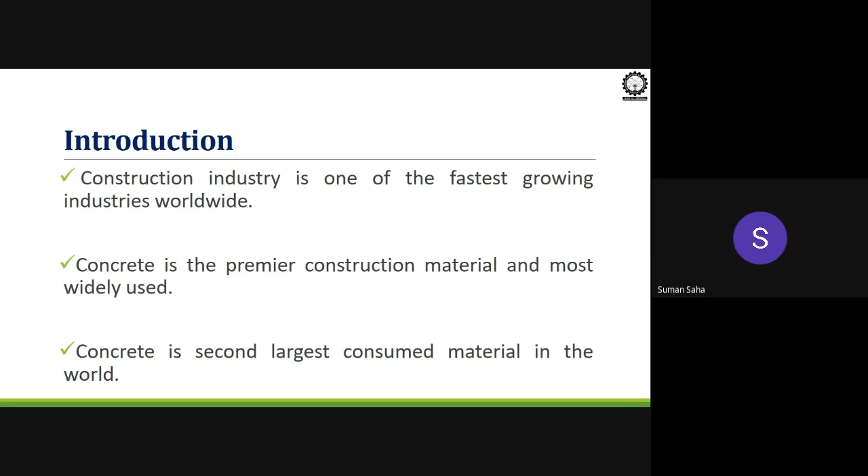Now, concrete is not the only construction material, so several things are there. Due to that, we need a lot of natural resource procurement to produce cement and aggregates. All are natural resources. If we consume totally in high demand, they may not be available in coming days or in the future, then we will face a lot of problems creating concrete with desired properties.

As I mentioned, people claim that this industry pollutes the environment significantly, but believe me, we pollute, but not that much. We are changing the scenario by finding alternative materials for concrete or for other purposes, so that we can minimize the pollution level and also conserve natural resources for the future.

As we know, from the point of view of any institute, we may now have 60 students in class 10, so we may need a small classroom. But in 5 or 10 years, the student strength may increase to 100 or 120, and in that case we need a larger classroom. So our requirements keep on changing, and we need to develop our infrastructure properly to accommodate all such desires.

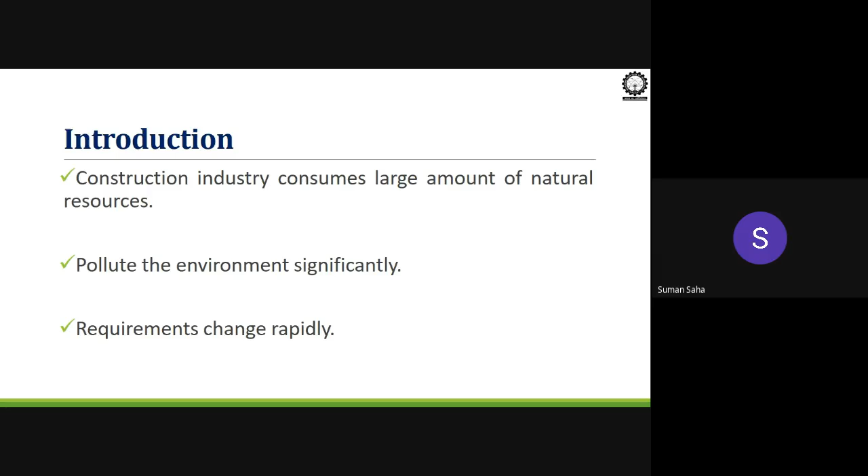I will discuss that in detail later. So in the construction industry, several topics are there for research to make effective advancement. I have mentioned only 4 parts: building materials, concrete technology, project management, and construction technologies, etc.

You have n number of sectors like finishing, plumbing, electricity fixing. So these 4 are not the ultimate parts of the construction industry for advancement. But today's talk, we will talk only about concrete technology, how concrete is evolving, how different types of concrete come into the picture to fulfill our wishes, our desire, our requirements.

So I have made a list about the different types of concrete which are getting adopted nowadays very well. But again, I am reminding you, this is not the ultimate list. Many types of concrete are there, and those types of concrete have their specific purpose to be in use.

I just request you, if you search in Google itself, you will get n number of concretes, but I have made a list, and among all the concretes, we will talk in detail about geopolymer concrete, and I will tell you why it is very special to be an alternative concrete for future days. First, I will describe a few words about these types of concrete, like high performance concrete, self compacting concrete, fiber reinforced concrete, recycled aggregate concrete, high volume fly ash concrete, reactive powder concrete, self-healing concrete, and at the end, geopolymer concrete in detail.

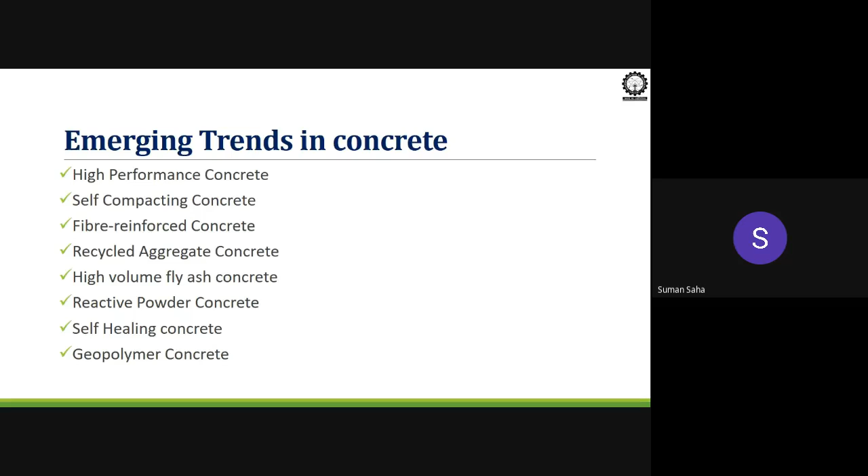By the name itself, since you are all from a civil engineering background, you can understand what specific characteristics are there for this particular concrete. Just because if we talk about high performance concrete, what is that? It itself says that concrete should perform high. What does it mean? In normal concrete, usually what we do is use OPC, and we use fine aggregate, coarse aggregate, water, admixture, different things.

But normal OPC strength, maybe maximum we can design the mix design concrete up to M50 or M60. But when it comes to the terms of high performance concrete, performance is not only the compressive strength. Even though we know compressive strength is the main characteristic of concrete, along with that we should have proper workability from the starting of mixing to the placing of the concrete.

While concreting, when it's a large construction project, suppose we are going to cast 100 cubic meters of concrete, if it gets set within a short span of time, then it will be very difficult to use that type of concrete. Even this higher compressive strength for this type of concrete, we can expect more than 60 MPa strength after 28 days, but that's not the minimum -- 60 MPa is the minimum, higher can be the maximum, more and more.

One more type of concrete you can hear about is ultra high performance concrete. In that type of concrete, the compressive strength level is more than 100 MPa, and better durability properties should be there.

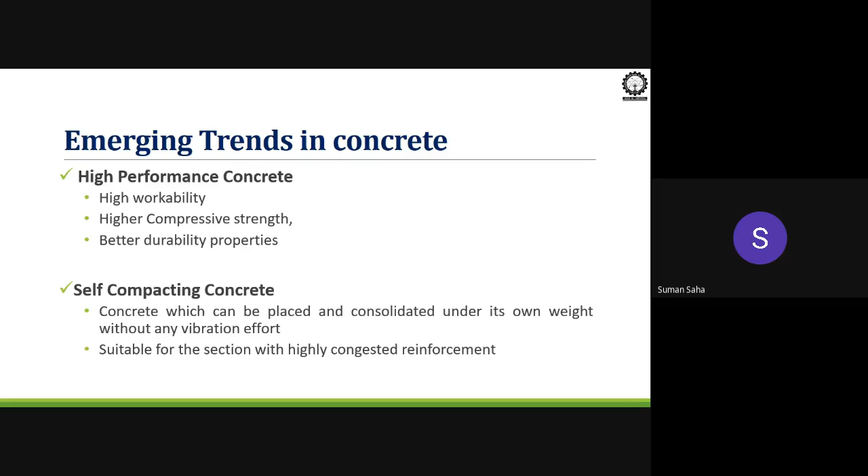Even all the industries are trying to use this concrete, introducing admixtures like proper doses of chemical admixtures, finer materials, so that without any vibration the concrete section can be cast, and it will be compacted by its own weight without any segregation, without any water evaporation. So it will be a very important type of concrete for the largely highly congested reinforcement section.

If you see here one photo, I have shown how the self-compacting concrete behaves, like one slump cone. If you put the concrete and lift the slump cone, the concrete will flow out on its own, without any segregation or water separation from the concrete, so it can be said to be cohesive.

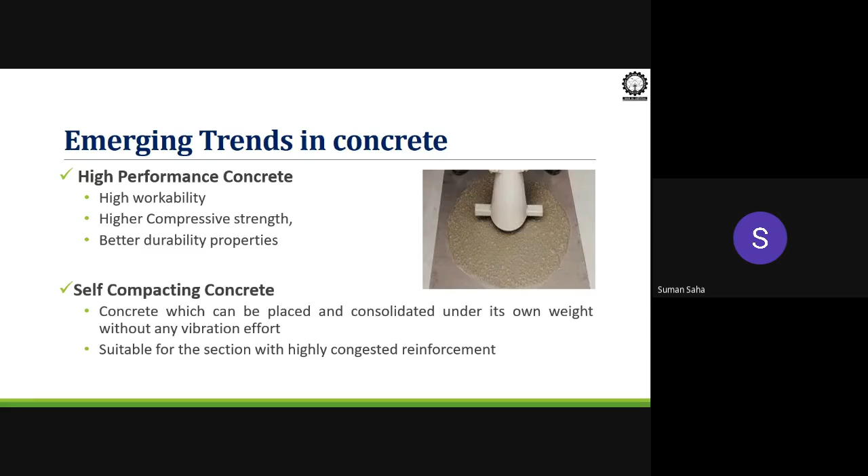So at the end we need to have at least the compressive strength, which is the main characteristic of the concrete. So it's always very important to notice whether this concrete is getting compacted properly or not by its own weight. If it is not getting compacted, you may get different kinds of problems when you remove the formwork, some bulging, or in some places voids. This will create a lot of problems later for gaining strength, as well as for durability aspects.

Next is fiber reinforced concrete. Why is it becoming very familiar, very famous in concrete construction? Just because we know concrete always performs better in compressive strength, but when we need a little tensile strength, or we feel more tensile strength should be there, or flexural strength should be there for the concrete, what we introduce is discrete fibers.

It may be steel, it may be polypropylene, it may be natural fibers, but this fiber, when introduced, is randomly oriented in the concrete mix, and it tries to arrest the crack. What it leads to, when you arrest the cracks, is that you try to keep the concrete in position, and outside ingredients like water or deteriorating agents should not penetrate the concrete. If they do not penetrate the concrete, it will serve for a longer time.

So again, these properties of fiber reinforced concrete depend on different types of fibers, and its geometry, like aspect ratio - I think all of you know - is a very important parameter for fiber reinforced concrete. Aspect ratio is nothing but the length of the fiber divided by the diameter of the fiber.

The distribution and orientation of the fibers in the concrete mix is very difficult to justify, but nowadays there is a lot of numerical modeling to understand how it gets distributed, how it gets oriented, how it arrests at the angle of orientation. A lot of research is going on. If you search papers on the internet, you will get a number of papers. So it's a promising area to do research.

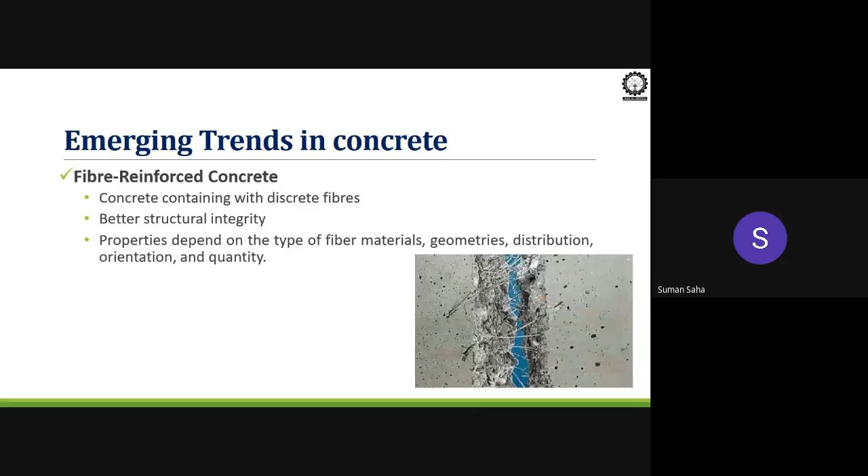As a result, total overall structural integrity of the concrete structure will get increased, and it will give better service to us. Next, recycled aggregate concrete.

It's nothing but - let me explain - recycle aggregate, what is it? As I told earlier, we need to preserve our natural resources. If we keep on using all the natural resources to produce concrete, after some time we may not get natural aggregates to produce concrete.

Along with that, we are generating a lot of concrete demolition waste due to various reasons. I told a few reasons earlier also. Some buildings, some concrete sections are there that have already served their life and now need to be demolished. For those types of structures, after demolition, if we can use this waste concrete part as aggregate - maybe as fine aggregate, maybe as coarse aggregate - then we can save a lot of natural resources.

So again, in that aspect too, a lot of drawbacks are there to using recycled aggregate effectively to get the desired properties. There are a number of papers on this, and even I have a few papers - not so many, very limited - but few papers are there on recycled aggregate concrete also.

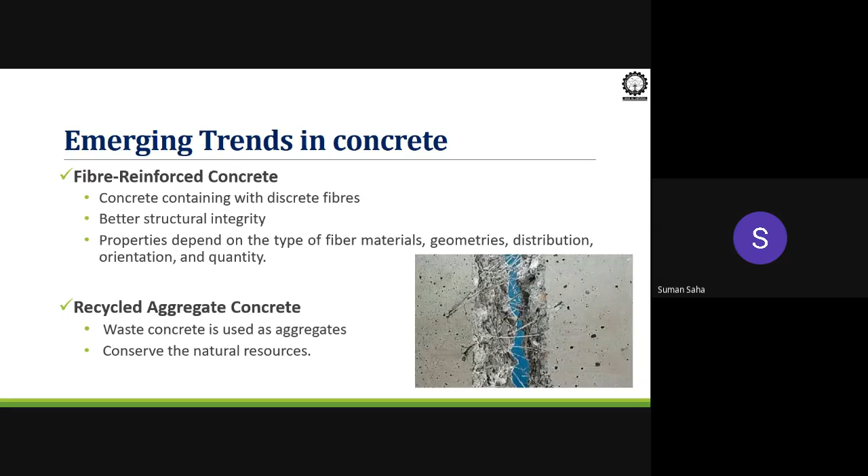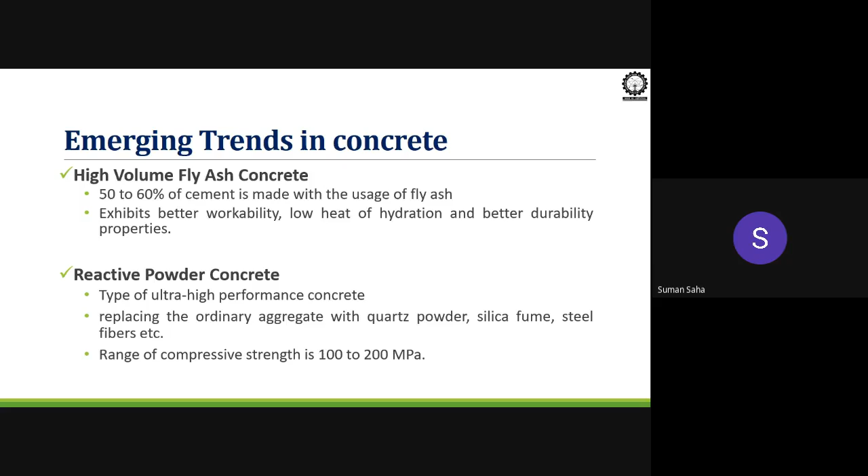To make it super compacted and gain high strength, usually quartz powder and silica fume are used. Even fly ash and GGBS are also getting used. When incorporating this material, we are trying to reduce the coarse aggregate in the concrete - there is a very minimum quantity of coarse aggregate in reactive powder concrete. It's now an emerging area for research and for application in daily life, but it has a lot of drawbacks we have to work on to use it effectively.

Next is self-healing concrete. The name itself tells that the concrete heals itself. You can search this as bacterial concrete also. Sometimes we introduce bacteria, and in the hardened concrete structure, they react with the hydrated product and create some carbonate or chemical substance to fill cracks or voids wherever they are generated. So it is said that these cracks are getting healed on their own due to the presence of the bacteria. Usually Bacillus bacteria are used as of now.

I don't have knowledge about other bacteria. It may have, we need to search.

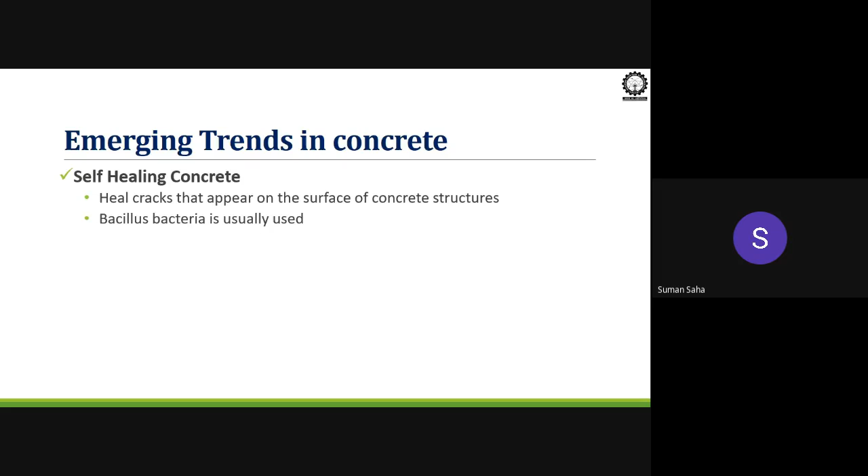As a result, it will be better durable concrete. And next, not last, but next, geopolymer concrete.

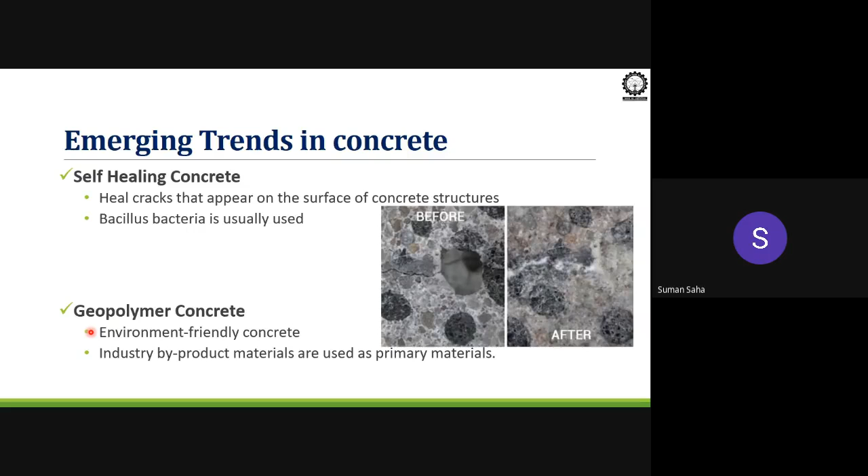It's environmentally friendly concrete. To produce this geopolymer concrete, we usually use industry byproduct materials as the primary materials. We will discuss this in detail, because to produce geopolymer concrete we are not going to use a single percentage of OPC, so it's OPC-free concrete. We use industry byproduct materials rich in silica and alumina, specifically fly ash and GGBS. Fly ash is a byproduct of thermal power plants, GGBS from steel plants. Silica fume can also be used, but it is a bit costly.

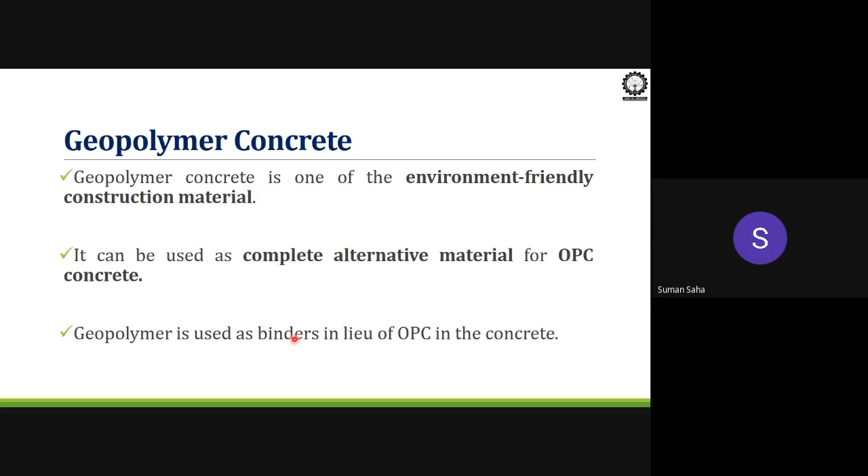So whenever we talk about the cost of concrete, we should not go beyond our limitation. If the concrete becomes too costly, people won't use it - it should be cheaper than OPC concrete, then only people will show interest to use it. As I told, geopolymer is used as a binder in lieu of OPC in concrete. So why not OPC concrete?

I have already mentioned that to produce OPC, we need a lot of natural resources and energy. Due to that, we may face shortage of natural resources in future. Even statistically, 5 to 8% of total carbon dioxide emission is from production and consumption of OPC alone. And we are a developing nation with a huge population. For that reason, we are the second largest cement producer, and consumption-wise also second, next to China.

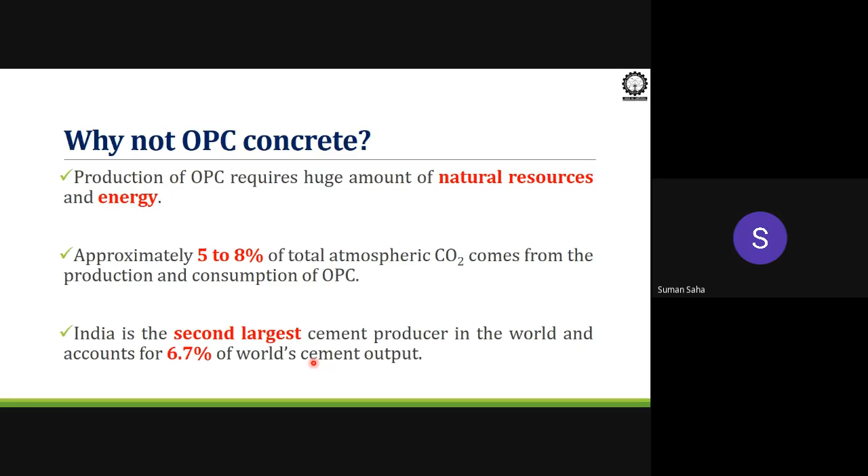Even though it accounts for only 6.7% of world cement output, we are second. If you check the statistics, we are far away from the basic per capita demand of cement consumption. Worldwide it is around 500 kg per capita per person, but in India it is only 195 kg. So we are so far away, but still we are the second producer and second consumer.

You can see as time passes, we are producing more cement and consuming more. So if we can reduce the consumption of cement by establishing alternative materials, it will be better. We can directly or indirectly reduce carbon dioxide emission, protect natural resources required to produce cement, and most importantly save the energy we employ to produce cement.

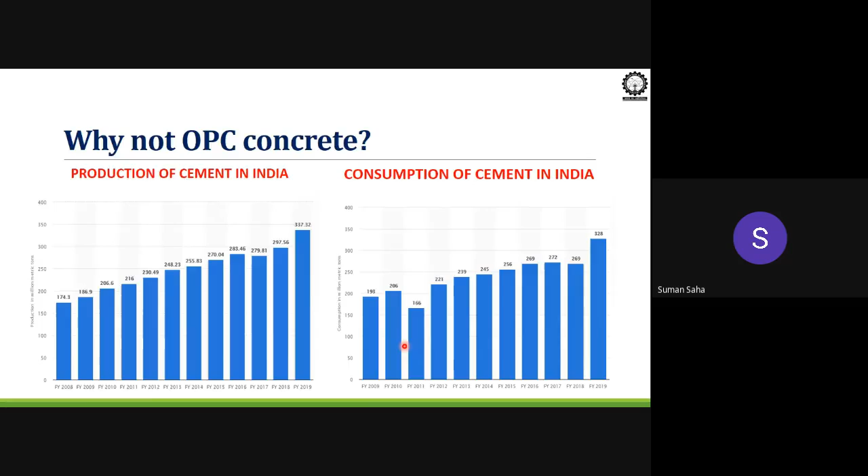I feel everyone knows about the production process of OPC in industry. So what is geopolymer? Geopolymer is nothing but an alternative binder material. It was established by Professor Davidovits, who is specialized in chemistry, in the year 1978.

But till today it is not getting used effectively by us. Research keeps on happening to make this concrete easily available to society for use. I will show you how tremendously research is increasing on this geopolymer concrete. It is a resultant product from source material very rich in silica and alumina, like fly ash and GGBS. This fly ash and GGBS will react with water, but very slowly - that's why we usually call them pozzolan materials. But if we provide a highly alkaline solution instead of water, it will react and create cement.

When water comes into the cement particle, it will start reacting and form the CSH and it will get hardened. Similarly, if you have an alkaline solution and pour in fly ash or GGBS, it will also start reacting, forming some CASH structures, and it will get hard like cement.

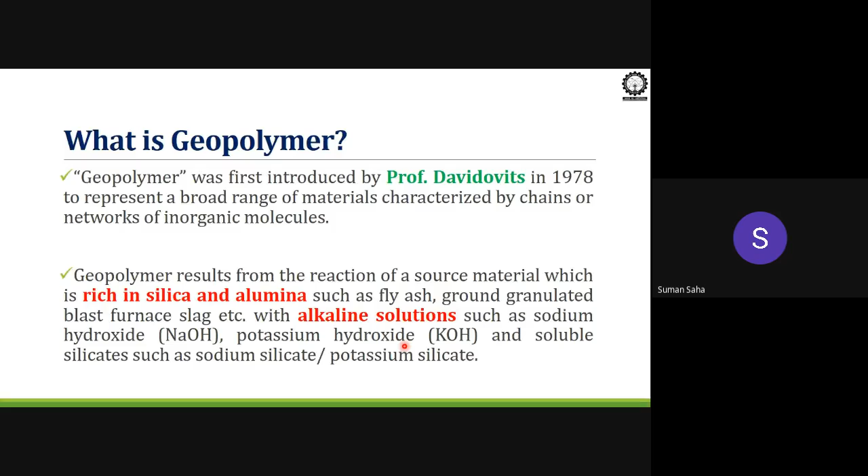That's why people started thinking and doing research to establish geopolymer as an alternative for cement. It's already established, but a lot of difficulties remain in using it effectively, which is why research is still going on.

After the reaction, you can see this type of bond. When cement reacts with water, CSH gel is produced. But with geopolymer, silica-alumina rich material reacts with the alkali solution to create this Si-O-Al bond, called the sialate structure or sialate bonds. It's like a nomenclature, chemically represented by the sialate bonds.

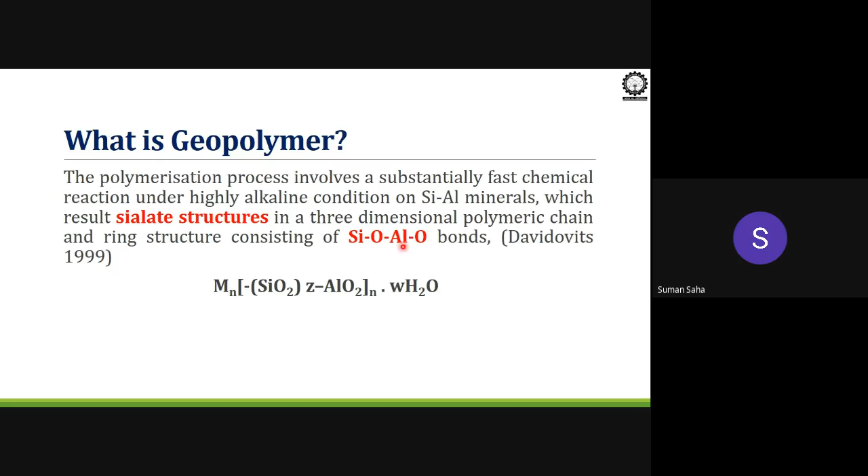I will show you the schematic reaction. This is the fly ash or GGBS, the silica-alumina rich material, written as N. The hydroxyl ion and H2O come from the alkaline solution, and it will first form silicate and aluminate, which react together to generate this bond and provide strength like cement.

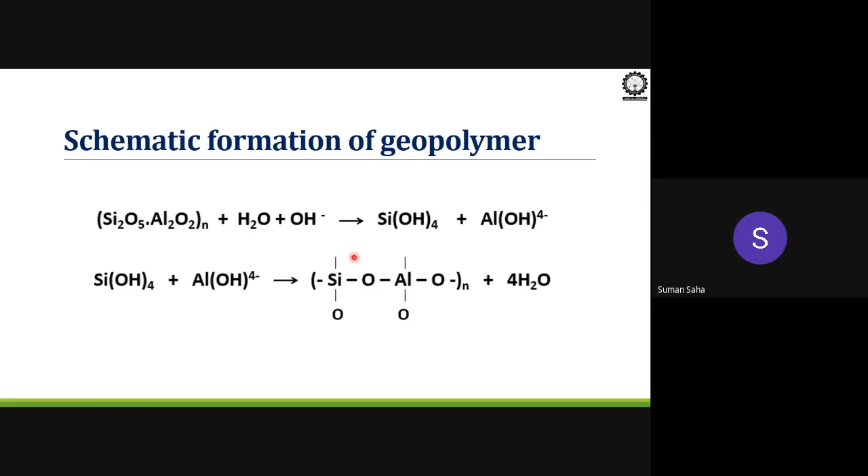I can show you different kinds of sialate structure based on the silica and alumina ratio in the source material. Fly ash or GGBS procured from Karnataka versus West Bengal will have different properties or content of silica and alumina. So if we know the silica and alumina ratio in the source material, we can tell which type of sialate structure will be formed.

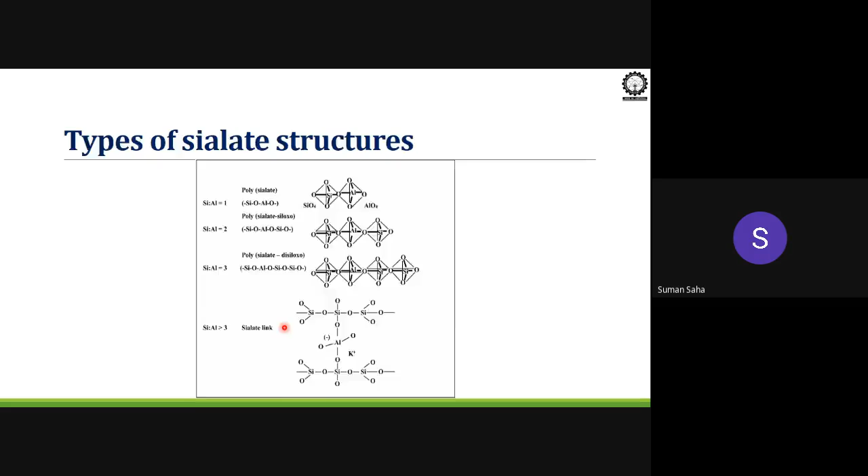When it is greater than 3, an n-number series will create the sialate structure, and a polymeric chain will form as a continuous structure. I'll show you the detailed process of this geopolymerization, how it works, in words, but I will show you visually.

Professor Duxson has established this model. You can see this alumina silicate source - it's nothing but alumina-silica rich material. When we provide this alkaline solution, this alumina silicate material dissolves and forms aluminate and silicate.

Then it starts reacting with each other and releases water, and gelation or coagulation starts to form this sialate structure. Later they keep reacting with each other and reorganize themselves, and at the end it creates the polymeric chain and gets hardened like normal cement does by forming calcium silicate hydrate.

Some literature calls this sodium aluminate silicate hydrate, but I think it's not better to say that, just because it's not a hydrated product. It's a product of a different chemical reaction, and at the end it creates the polymeric chain and helps harden the concrete.

So at the end, what are the constituents of geopolymer concrete? Firstly, source material is very important - silica-alumina rich source material. I have given a few examples: fine aggregate, coarse aggregate, and alkaline liquid. This is a very important part of geopolymer concrete.

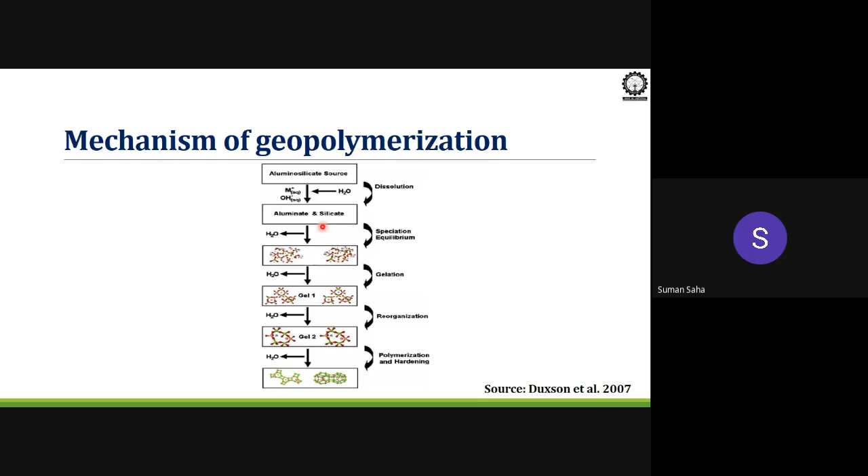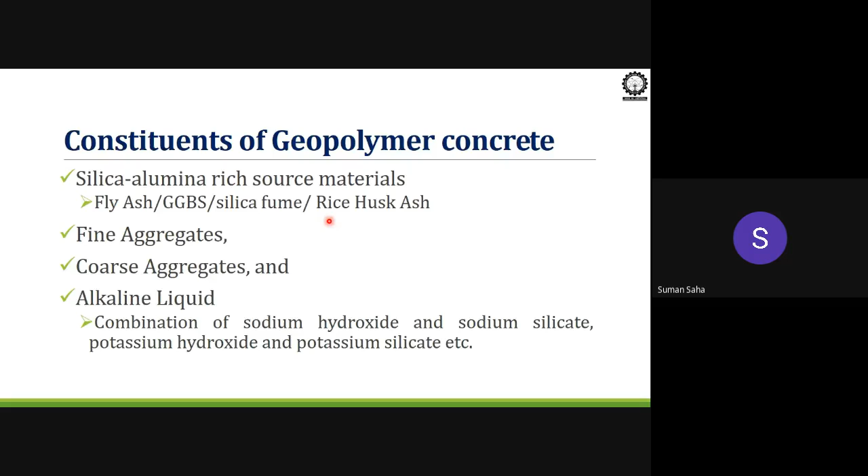This makes the aluminum silicate sources dissolve to form aluminate and silicate. So this combination of sodium hydroxide and sodium silicate is found to be the best suitable alkaline liquid to form this OH-minus ion along with water, to react with the source material to form the sialate structure and help gain strength. So what are the main parameters to check regarding the properties of the concrete?

Type of source material - again, I'm repeating the same word. Source material properties change even if you travel 10 kilometers or 5 kilometers. So it depends on the source material. Before starting work on geopolymer concrete, we should characterize the source material properly - its chemical composition, how it reacts with the alkaline solution, every detail about it - before incorporating or producing the geopolymer concrete.

And as I told you, the alkaline liquid should have some concentration, and since it's not water, we have to prepare this hydroxide solution.

As I have told you, the combination of sodium silicate and sodium hydroxide is the best suitable combination to be used as the alkaline liquid. For that, we need to prepare this solution. Usually most literature will suggest preparing the combination of this solution 24 hours before use. Like if we are going to cast concrete tomorrow, today itself this solution has to be prepared.

For better understanding, if you prepare hydroxide solution, you'll notice a lot of heat is generated. So when we prepare the desired concentration of hydroxide solution, we need to let it cool down. Then we will incorporate silicate with our designed ratio, mix it up properly, and keep it for 24 hours before using it to produce geopolymer concrete.

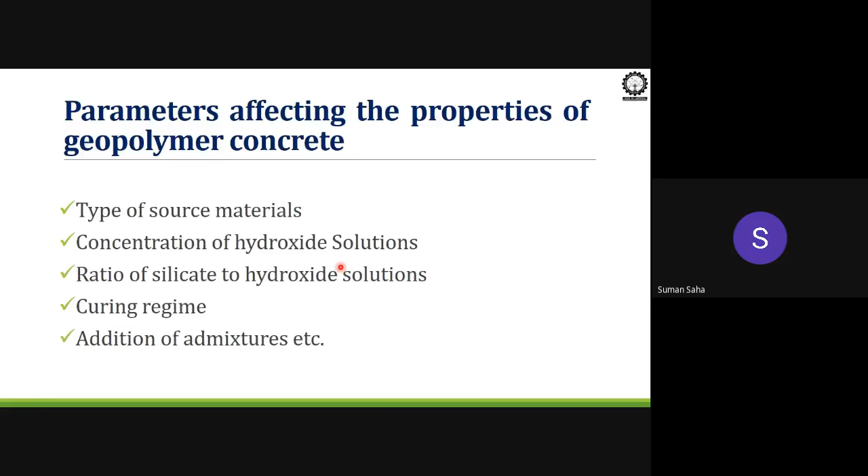What I want to mention about the curing regime is that without any moist curing, it can be kept at ambient temperature. In air curing, it can gain strength. So if we have no need of water to cure the concrete, we can save water also. Even this geopolymer concrete, if we provide a little bit of high temperature heat, it will perform better with respect to compressive strength. Therefore, in the summer season, when we face high temperatures, it may show better and higher strength.

Addition of admixture also may differentiate the properties. If we use superplasticizer, it may give more workable concrete, but it may show adverse effect on strength. But all of this is subjected to checking in the laboratory scale, and at the end we need to implement it at real scale to check whether whatever we have observed in laboratory scale gives similar results in the real field.

That's why a prototype model is very much required. I will share some experimental observations, very basic tests on geopolymer, not on concrete. As I told earlier, we have a lot of guidelines from the Indian standard. So to establish geopolymer as an alternative binder material, we should have a proper idea about how it acts, how it reacts, and what the setting time is about.